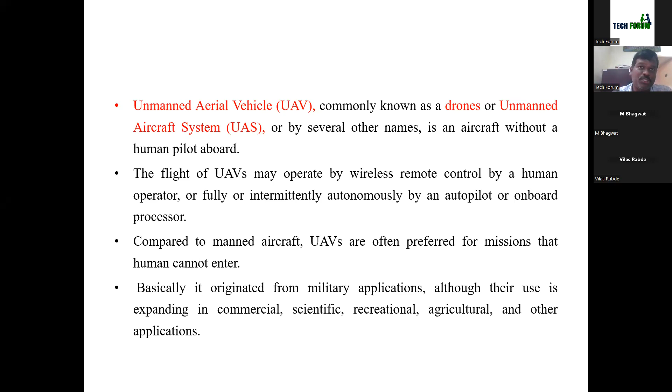So as I already said, drones can either be controlled by means of a wireless manner, or by a program - an automatic program we have to fuse inside the drone. Depending on the application, you can control it either through an autonomous manner or a manual manner. So that depends upon your application. Basically, it is utilized in military applications, and now it is extended in application towards agriculture, scientific, as well as commercial applications.

Coming back to the drones, there are various types. Based on the types we can classify the drone. The first one is the fixed wing drone or fixed wing unmanned aerial vehicle. The second one is the rotary wing unmanned aerial vehicle. The third one is the flapping unmanned aerial vehicle.

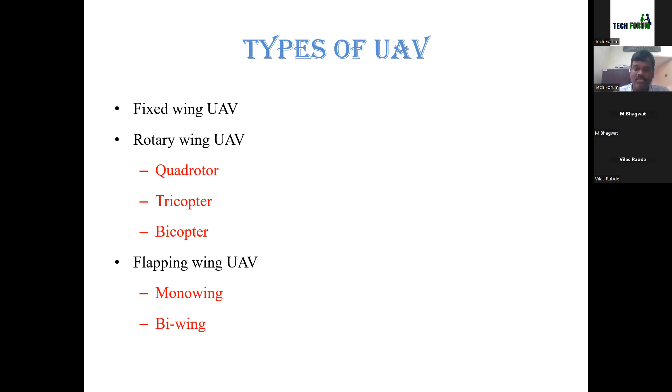Further, if you categorize the rotary wing unmanned aerial vehicle, you can classify it into a quadrotor type, a tricopter vehicle, or a bicopter vehicle. Coming back to the flapping wing unmanned aerial vehicle, it is classified either in the mono-wing model or the bi-wing model.

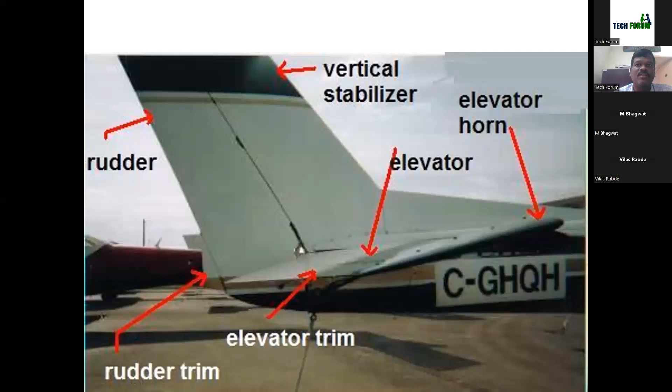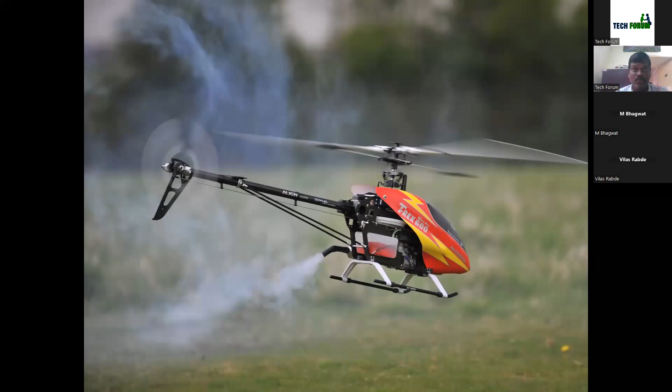Whereas in the case of the rotary wing unmanned aerial vehicle, you can see here in this slide, there is a rotor which is fitted on the body of the vehicle, which is necessary for flying, needed to lift off the vehicle or to fly the vehicle.

So the classification is very simple: whether it is fitted on the body of the vehicle, or it is fitted as the rotor of the vehicle. Based on this, it is classified as fixed wing as well as rotary wing. You can see in this figure it consists of only one rotor, so this is said to be a mono wing multi-copter. You can call it a mono wing copter, or it's a normal helicopter.

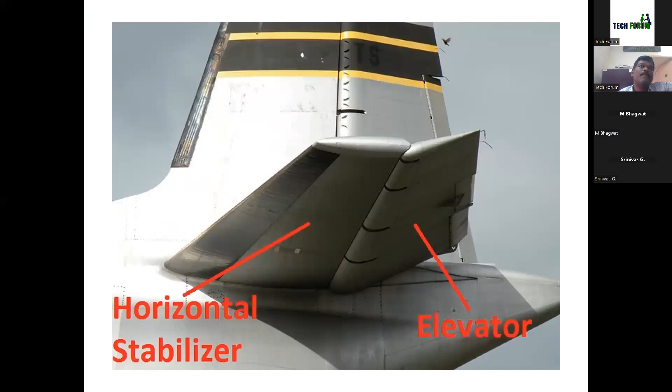So coming back to the original slide. Yes, this is a fixed wing unmanned vehicle. This is where we started. So the next is about the fixed wing unmanned aerial vehicle.

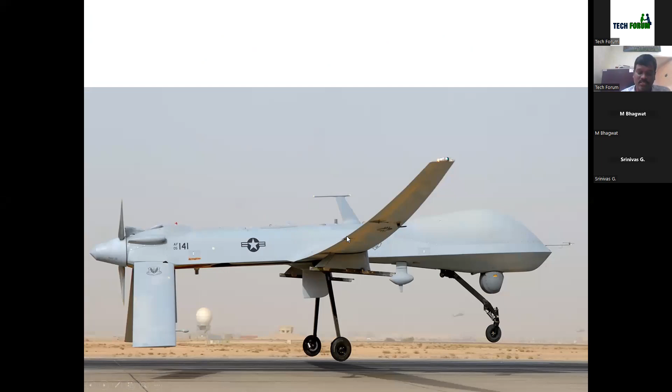Here you can see that at the belly of the aircraft, the wings are fitted. The wings are mandatory and necessary to fly the unmanned aerial vehicle. So how this actually works is a very important point, and most of you are already aware of how airplanes work. Anyway, for the benefit of all the users, I will explain a little bit about how things actually work.

It basically works on the principle of Bernoulli's principle. You might have heard of the Bernoulli principle: whenever there is a velocity, a low pressure is created at that particular point.

So that is the basics of the Bernoulli principle. You might be blowing a whistle. When you blow some air on the whistle, at that particular spot, a low pressure is created. Whenever there is a low pressure, the surrounding high pressure will try to move from the high pressure to the low pressure. So this is what Bernoulli principle is.

Here also the same principle is applicable, as you can see in the figure. This is the cross section of the wing. If I cut the wing of the unmanned aerial vehicle, it will come to an elliptical shape. This elliptical shape is said to be an aerofoil.

The aerofoil shape is very important because when it is subjected to forward air, you can see when the unmanned aerial vehicle is trying to move with the help of the motors, the surrounding air hits the wings. The air molecules which hit the top travel in a very fast manner compared to the bottom. So the air molecules on top travel very fast, whereas the air molecules at the bottom move much slower.

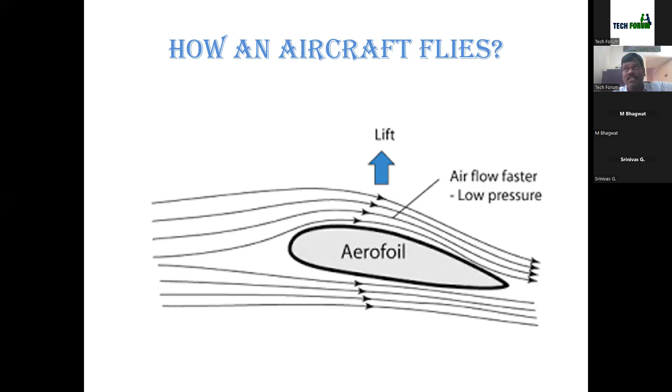Automatically the aircraft will take off from the ground. This is the basic principle of how an aircraft flies. So right now we know how the aircraft is flying.

In order to produce the lift, we need some sort of thrust. This thrust generally comes from a propeller, a motor which is fitted on the nose of the aircraft. When the propeller rotates, it pushes all the air molecules from the front side towards the backward side. This is called thrust.

When you have a thrust force, the unmanned aerial vehicle or drone will move in the forward direction. Whenever there is forward movement, the surrounding air molecules hit the aerofoil or wings, resulting in a pressure difference being created. Once the pressure difference is created, the wing produces a force called lift force. When the lift force overcomes the weight, the airplane starts to lift off from the ground.

There is something called drag force. Drag force is the force which affects our thrust force, or it is a force opposite to our thrust force. This is because of the air resistance produced by the body of the aircraft.

You can see here the entire airplane is something like an elliptical shape. In order to reduce the drag force, they design the airplane in the form of an elliptical shape. It is the best shape to reduce the drag force. Our ultimate idea is to reduce the drag force and increase the lift force.

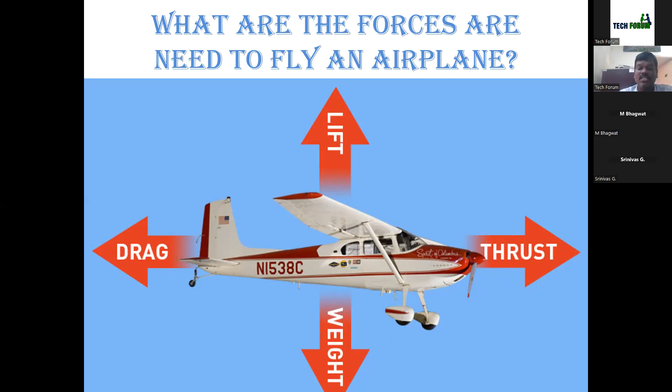If there is any imbalance of these forces, it results in a change in the orientation of the vehicle. You can see it like a seesaw. If the biggest person applies a small pressure, the other part, the girl, will lift off. Similarly, if she applies a little pressure, this person will go down more. It's like a seesaw, and this is how we can control the plane. If we apply a small pressure at the back side, the front side will move upwards.

Similarly, if we apply a small pressure at the front side or the back side, we can easily control it. This is the same principle of how drones are controlled. If I want to lift off my vehicle, I need to apply a small amount of force at the back side of the tail. What happens? My airplane will start to lift off. The nose will go in the upward direction. So a small force in the downward direction creates a high force in the upward direction.

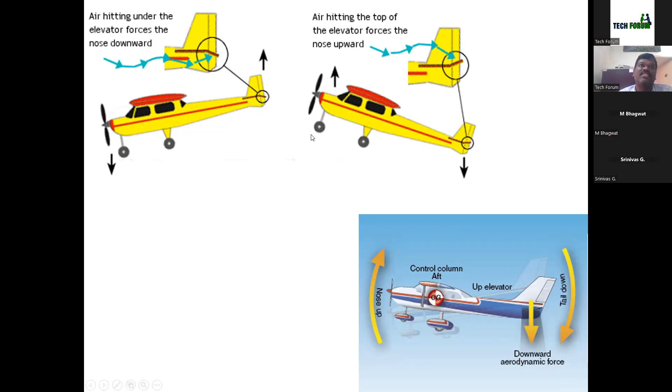How is this created? This is very interesting. Similar to the wings, there is a small wing presented on the backside of the aircraft. By controlling this in the upward direction as well as the downward direction, I can control the entire vehicle in the upward direction as well as the downward direction. This is how an airplane can be controlled.

There is a small tail fin fitted on the backside of the drone. If I apply a small movement at the top side, it's like a seesaw. If I apply a small force here, my aircraft nose will go up for takeoff. For nose down or landing, you have to move this in the opposite direction.

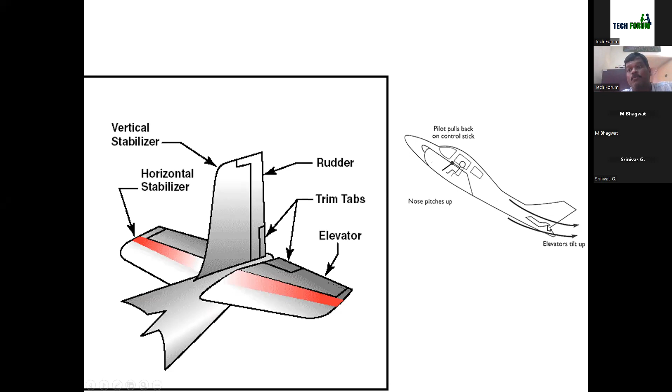You can see in this animation, if I want to go for takeoff, there is a small tail at the back side. If I move it in the upward direction, the nose goes upward. Similarly, if I go downward, the nose goes downward. Moving the airplane up and down in this manner is called the pitch axis. This is a very important axis for the airplane.

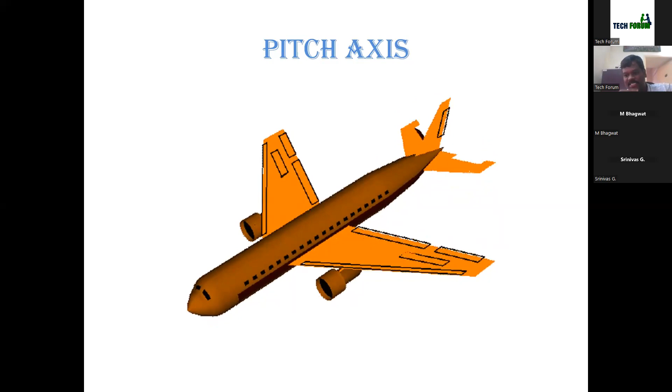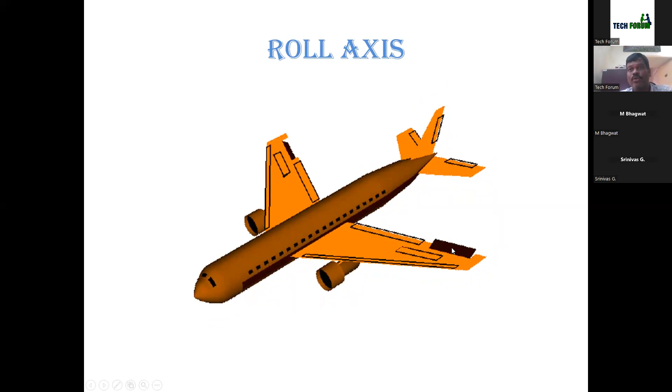Suppose I want to roll my aircraft, or turn 180 degrees left or right. There is a pair of control surfaces presented at the two ends of the wings, called ailerons. If you see here, it's very interesting: if one goes upward, the other goes downward, like a counterclockwise, differential manner. So if one goes up, the other goes down, and the airplane starts moving in a rolling movement.

This is called the roll axis. The last one is called the yaw axis. At the back side, there is a vertical tail with a small control surface fitted on the unmanned aerial vehicle. By controlling this in the left and right direction, I can control my drone or fixed wing drone in the left or right direction, just like our car, if you want to move left it moves left, if right it moves right.

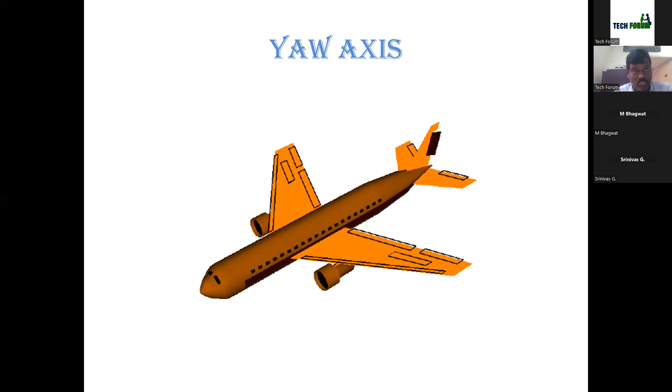I can control the drone using all three axes: the pitch axis, the roll axis, and the yaw axis. For any drone, these three axes are very mandatory, whether it's a fixed wing drone, a rotary wing drone, or a flapping wing drone. Wherever it is, these three control surfaces are very necessary in order to understand the unmanned aerial vehicle's working as well as for experts.

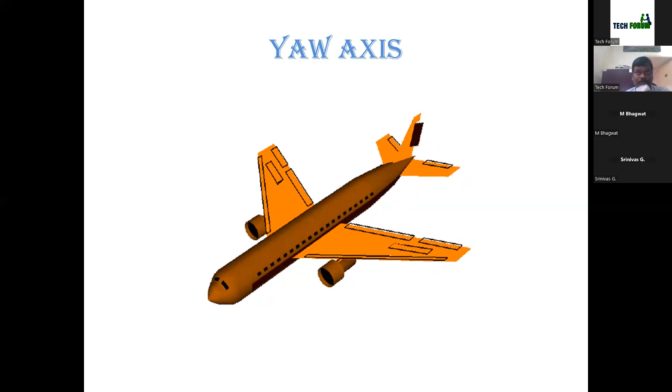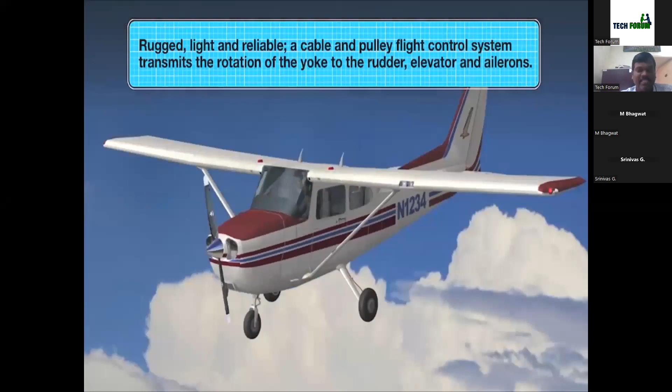I hope there is a small video that will help you understand how the entire airplane is working. Maybe it will take a little bit of time, I will explain.

Here you can see how the rolling moment occurs, and this is the pitching of the unmanned aerial vehicle. If he applies the particular control, this is for the left and right, as I explained. It is controlled using his leg, and while controlling the leg, he can control left hand as well as right direction.

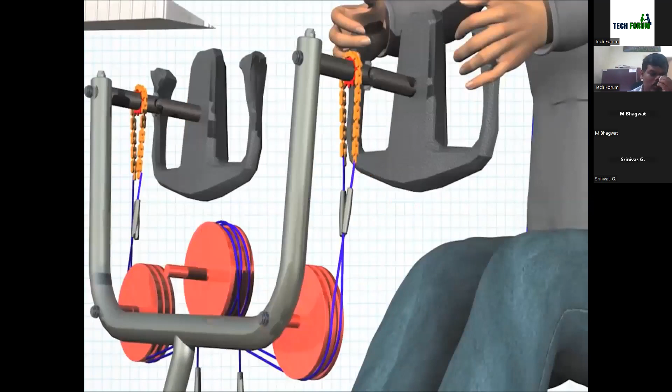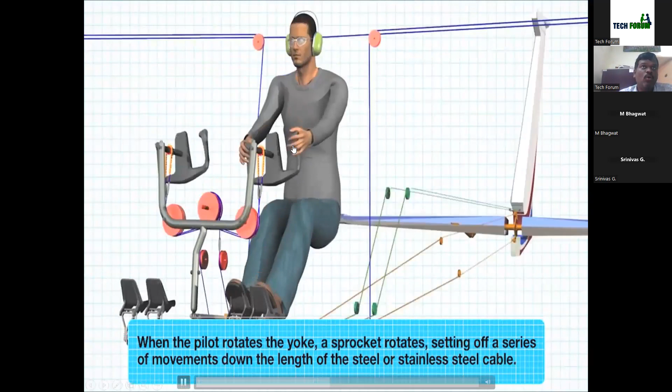This is how the wire mechanism has been connected. This is something called a control wheel for an unmanned aerial vehicle. When he moves it, these are all connected to sprockets as well as cables, which are necessary to control the particular control surfaces.

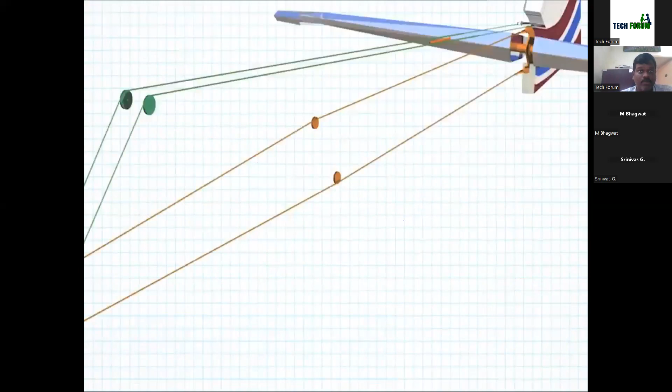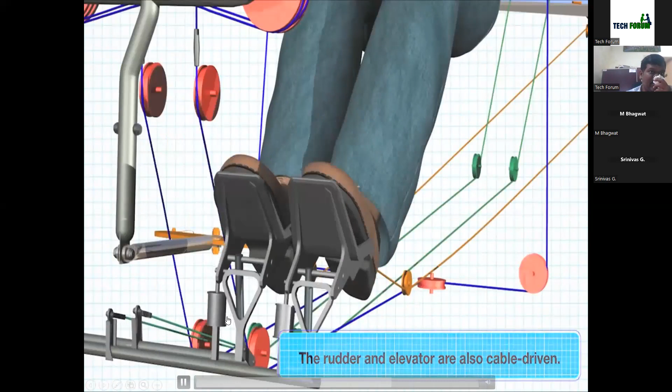This is something called the rudder, like our brakes. If he presses like this, it is connected to the corresponding wires as well as levers to control the left and right direction.

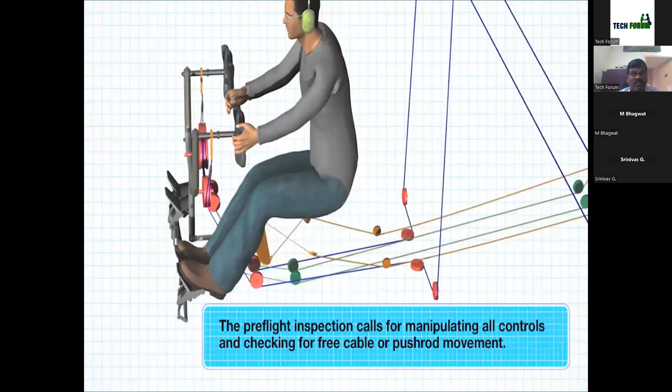So this is for the pitch, and this is for the left and right direction. The entire thing is similar for a commercial plane, whereas it is applicable to the unmanned aerial vehicle too. So either it may be a manned mission or an unmanned mission.

This is very important, right? These are all the very basics of unmanned aerial vehicles before you want to understand how the electronics will be helpful for aerospace engineers. In the previous video, you might have seen there are fully mechanical linkages that help control the horizontal stabilizers, the pitch, roll, as well as the yaw angle. If there is any problem in the mechanical linkages, we cannot control the unmanned aerial vehicle or the manned vehicle. So with the introduction of electronics into the aerospace industries, it might be helpful to control these sorts of problems. What happened,

if you connect these sorts of pulleys as well as levers to a commercial airplane, it will lead to a lot of cables, wires, everything associated with that. So it results in an added weight because of the mechanical linkages of all the components. It will add overweightage to our aircraft. If it is overweight, what happens? You need a large amount of lift force. If you want a large amount of lift force, you need to spend more fuel in order to fly the unmanned aerial vehicle. So we cannot accommodate more passengers if the weight is very high. So that's the problem. These sorts of problems have been easily reduced with the help of the introduction of electronics.

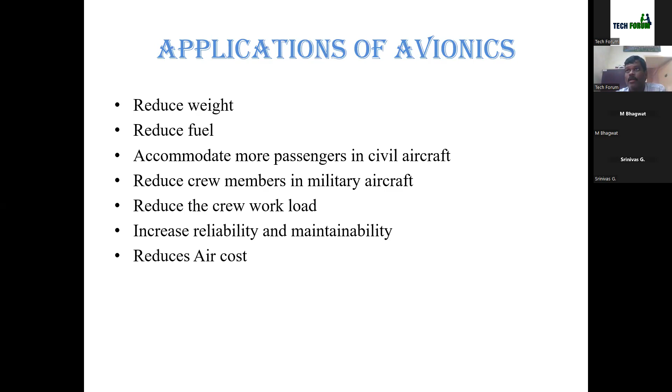That's called avionics. It helps to drive the manned or unmanned aerial vehicle with very minimum weight as well as minimum fuel consumption in order to accommodate more payload into the aircraft. And these are some of the avionics instruments available right now in the commercial as well as the drone market.

Whereas in the case of the current market, all the displays come into a single display, like our mobile touch screen. Wherever or whenever any emergency warning needs to be shown to the pilot immediately, that should be displayed on the pilot's main display. So that helps to reduce the number of equipment as well as accommodate pilot space. That's the biggest advantage of using this display system.

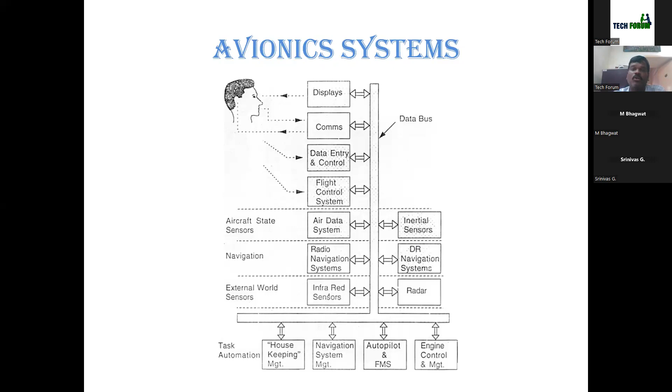With the help of the sensors only we can able to fly our quadcopter sort of drones. And there are additional equipments like radio navigation system, dead reckoning navigation system, and some payloads like infrared sensors, radars, housekeeping management. So these are all the associated electronics. It will help the pilot or the drone operator to optimize the work. So these are all some of the important factors.

And this is about how the helicopters are flying. You might be seeing about how the helicopters should fly.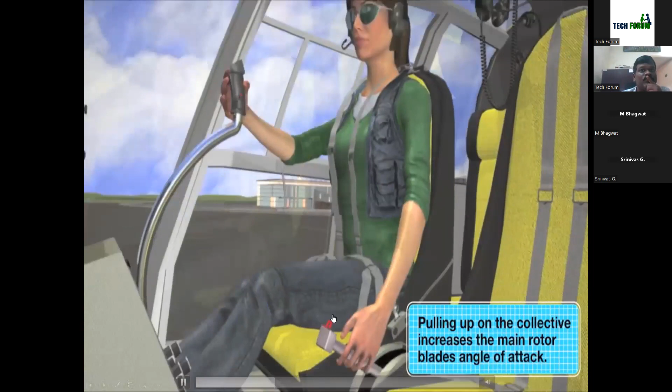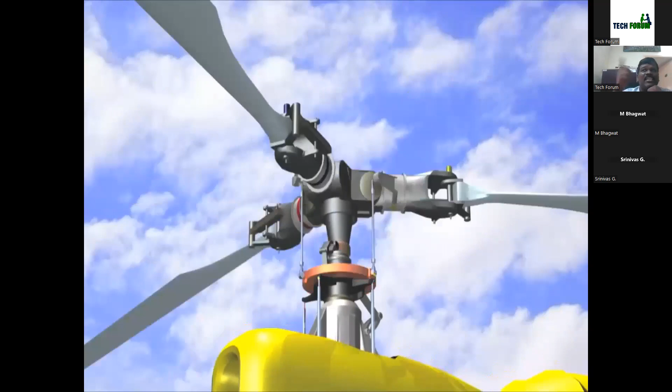And that's a very interesting video. It shows the comparison between the fixed wing unmanned vehicle as well as the rotary wing unmanned aerial vehicle. So here the very important factor of the rotary wing unmanned aerial vehicle is, as you already seen, there is a rotor which is rotating on the top of the helicopter. So what happens when it is at the ground, where the rotor is rotating, it's not at all a problem. Once it starts lift off from the ground, what happens?

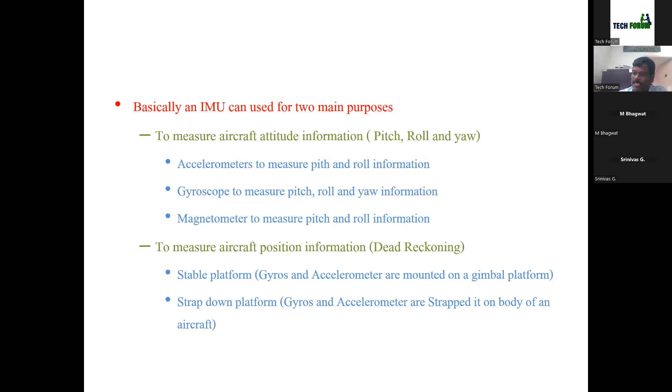So why is it actually needed? It will give a reference to the pilot or flight controller of where it is from. For example, I'm sitting at my work table. Suppose someone wants to know my position with respect to the corner of the building - from X distance I am sitting, from Y distance from the corner I am located so and so distance, and from Z reference I have to set this much amount of height. I can define my position in a particular place.

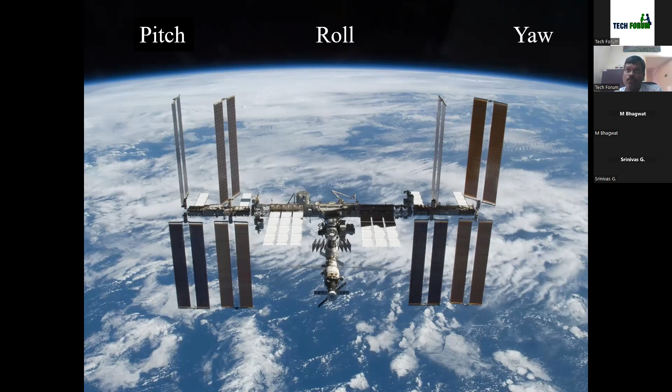Whereas in space, if you look at it, there is no such reference available. The space is open to you - we cannot define a reference in space. So in order to define the reference, we use angles named pitch, roll, as well as yaw angle - we already discussed this, right? This is something called a reference angle for the drones in order to identify where you are, where you should be, and how your force should be. So how to easily identify the particular axis, that is very important, and it's a little bit of mathematics.

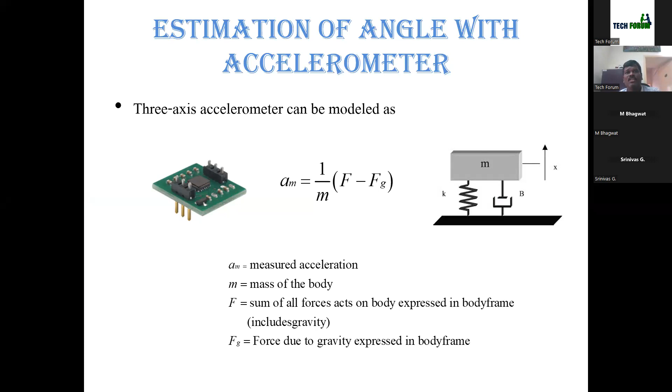I will try to explain with the help of IMU. The IMU comprises of two main equipment - one is called the accelerometer, the other is called a gyroscope. I'm not going in depth about the working principle, but anyway I will try to cover it. With the help of the gyroscope, we can identify the three angles: pitch angle, roll angle, as well as yaw angle of the vehicle. We can find out the angle with the help of the gyroscope. Similarly, we can identify the angle with the help of the accelerometer.

So now I have two sensors. With the help of these sensors, I can get very good characteristics from one sensor, but I also have some bad characteristics too. Similarly, the second sensor has some good characteristics as well as some bad characteristics. So my ultimate idea is I always focus on the good readings. I'm going to fuse the data coming from sensor one as well as the data coming from sensor two, to provide a better result. This is something called sensor fusion.

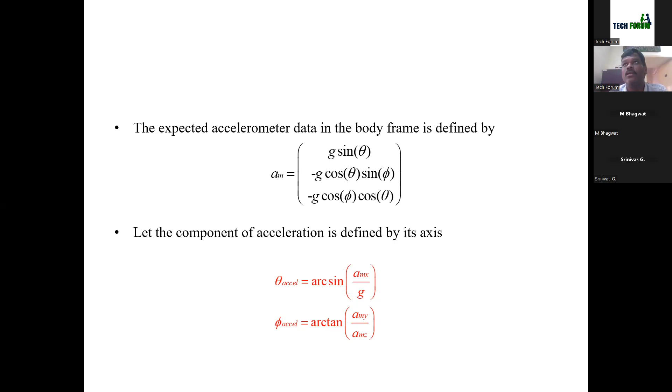So the sensor fusion - yes, the sensor fusion is a technique. It helps to get the good readings from one particular sensor as well as very good readings from the other sensor. So how do we achieve it? The sensor fusion here is a technique that helps combine the data from two different sources.

The first method is called a complementary filter. The second method is called a Kalman filter. The third method is called an extended Kalman filter. The fourth method is called an unscented Kalman filter. The fifth method is called a particle filter. These are some of the data fusion techniques currently available to scientific people. Just for simplicity, I'm going to explain the complementary filter for you.

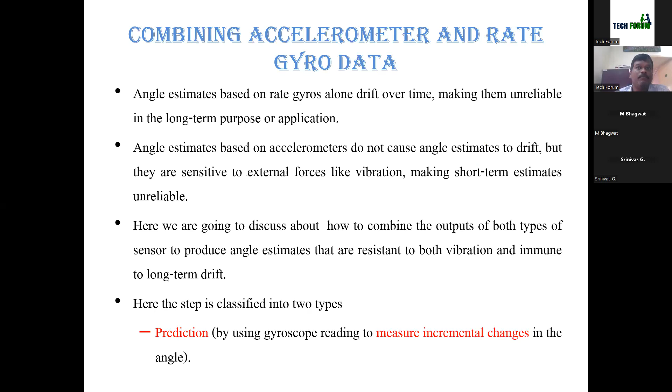That's my ultimate idea. But here the important point is how you are going to fuse these two data. Let us say instead of putting 0 or 1, now I am going to give a value of L equal to 0.5. If I give L equal to 0.5 value, I'm giving a weightage of 0.5 to the first sensor as well as 0.5 weightage to the second sensor.

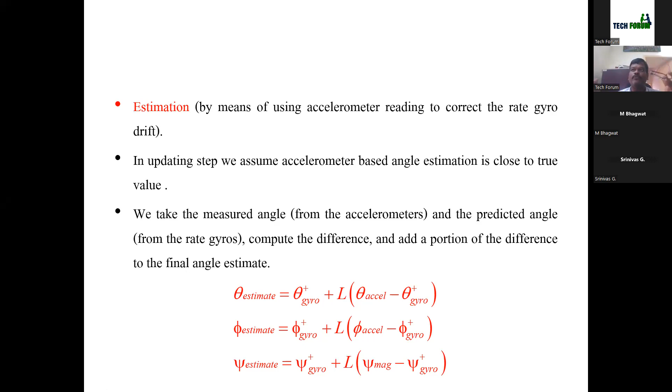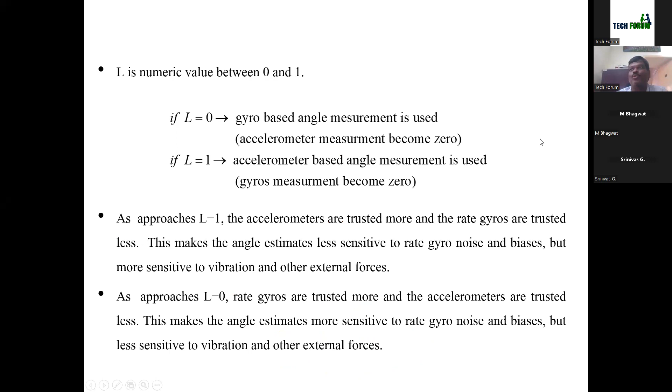Similarly, if I put a weightage of 0.25, I am just going to give a higher weightage to one antenna and lower weightage to the other antenna. That's a very simple technique. By using simple mathematics, we can fuse the two different algorithms or two data into an even better output. So this is what I explained here. L is equal to 0 means the gyro-based angle, L is equal to 1 means accelerometer. It's a way of getting better results for your applications.

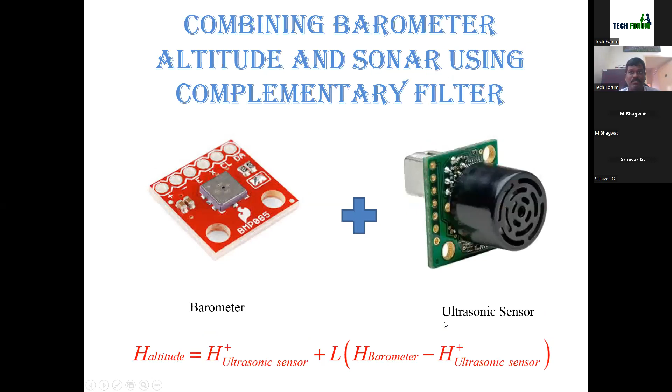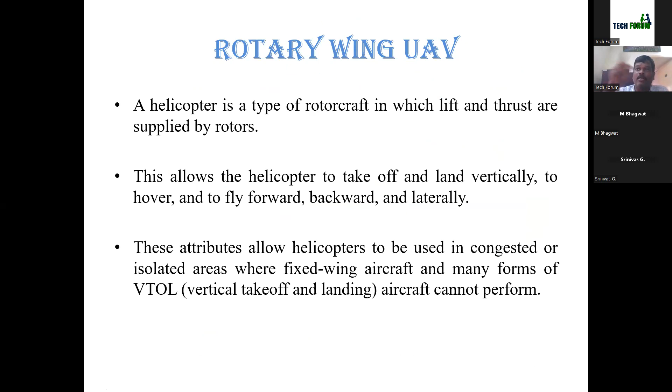Let us assume it is rotating in the clockwise direction. So once it is in the air, the entire body will start rotating towards the clockwise direction. In order to compensate this, we are supposed to fit a gyroscope on the center of gravity of the helicopter. It senses the auto rotation. Depending upon the rotation, it will drive the tail rotor. At the backside, there is a rotating rotor. Depending on the speed of rotation, it tries to rotate faster so that it will create a counteract force in order to arrest the auto rotation of the unmanned aerial vehicle, so that it will be flying in the same direction.

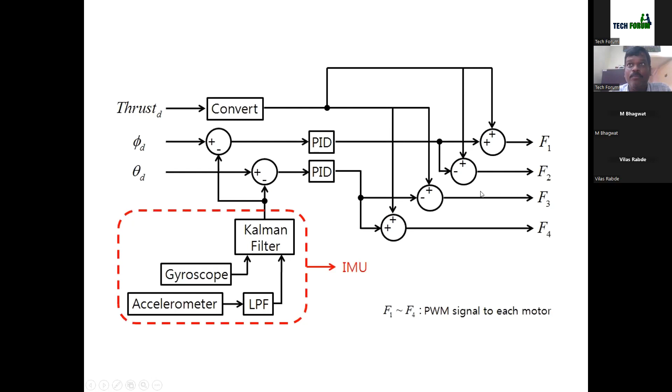Similarly, this angle, if you want to increase in the front, back, left or right direction, based on a slight reduction of the speed, we can easily achieve this with the unmanned aerial vehicle. As I already said, I have a gyroscope, an accelerometer, and I am using a fusing algorithm to identify what thrust is needed and where I want to go, left or right direction. Depending on that, I have to mix the signal and drive all the motors, which helps generate my forces F1, F2, F3, and F4.

And this is about the quadcopter, how it is flying. And this is the most interesting thing, something called an ornithopter.

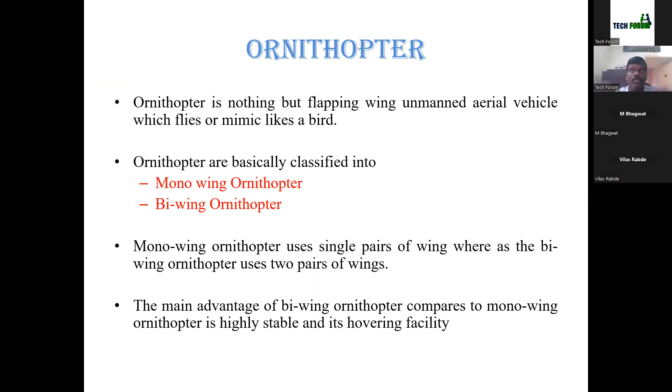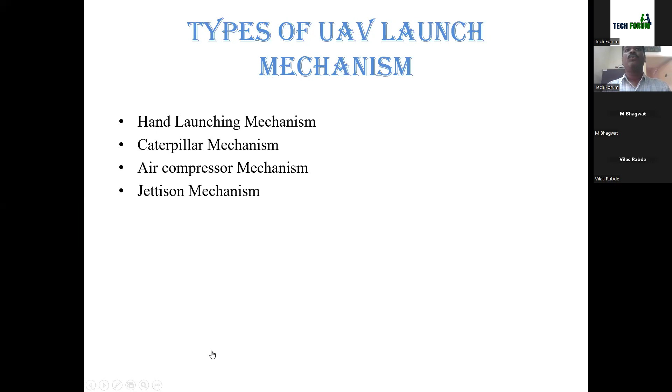And these are all some of the mechanisms for the unmanned aerial vehicle. This is something called a hand launching mechanism, where with the help of your hand we have to initially launch the unmanned aerial vehicle.

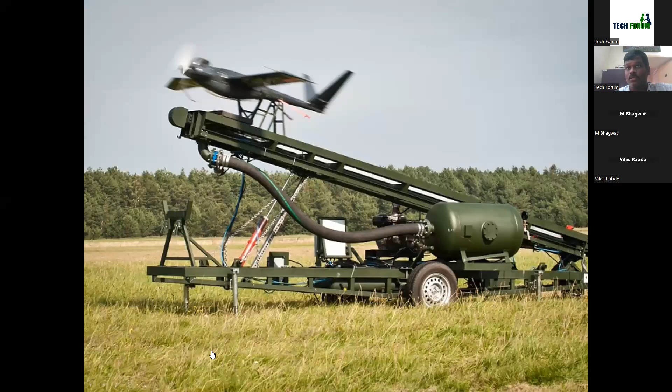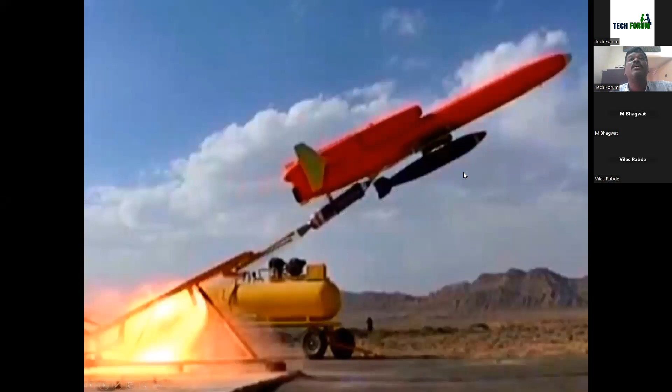And this is something called a pneumatic mechanism to launch the unmanned aerial vehicle. This is with the help of a rocket technique, we have to launch the unmanned aerial vehicle. And this is something called a jettison, which helps release the unmanned aerial vehicle.

And this is the autopilot. You can use any autopilot. It uses the same inertial measurement unit as well as driving equipment to control your unmanned aerial vehicle. These are some of the famous autopilots: ArduPilot, Pixhawk, and these are all commercially available.

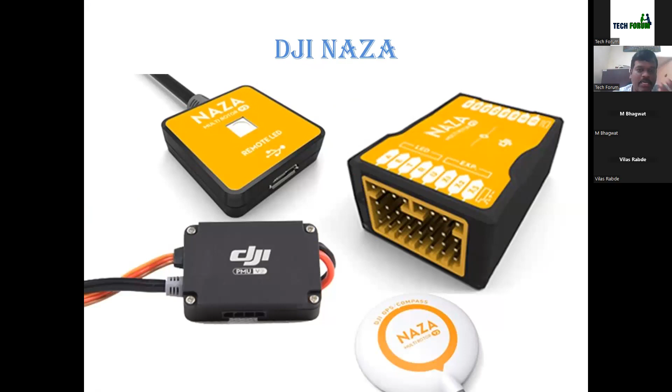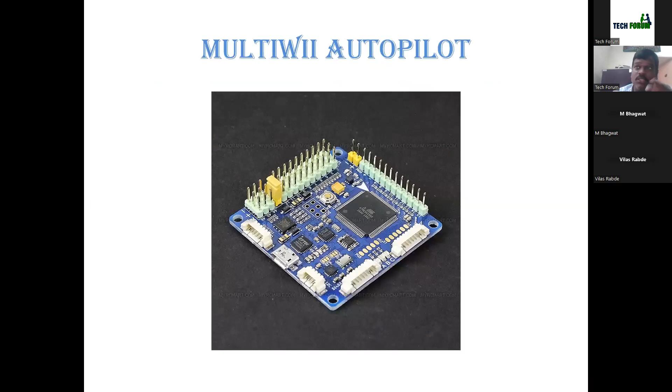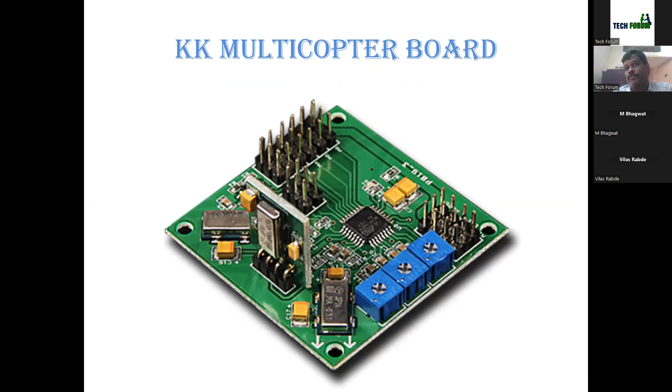It is a real-time operating pilot. And this is a MultiWii, a very cheap level flight controller, but it is a very beautiful flight controller. And these are some of the KK multi-copter boards, a very basic flight controller. Anyone can easily get this flight controller and fly their drones.